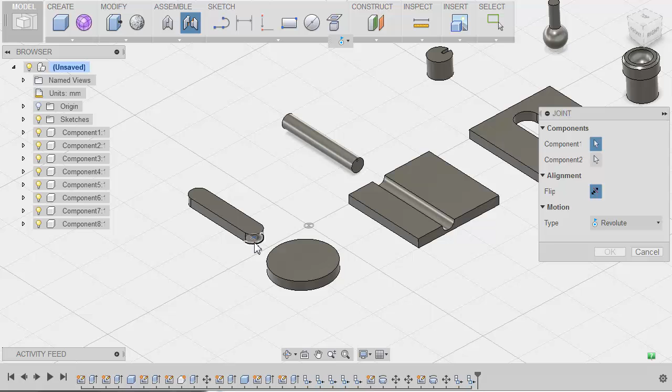We're going to start out by looking at the revolute joint. First, we'll select the point on the component we wish to move, and next we'll pick a point on the component we wish to remain still. A revolute joint allows the first component to revolve around a single axis. I'll choose OK to complete the command.

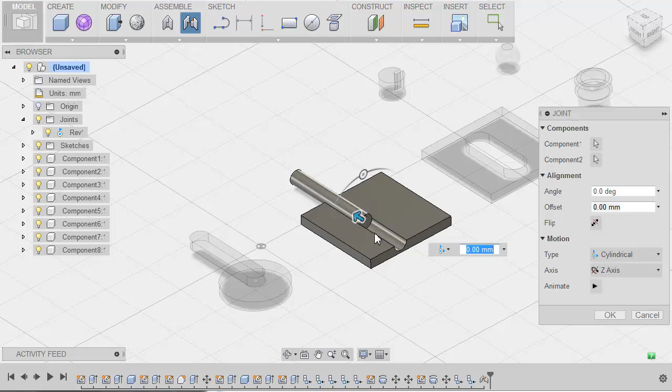Next up, let's take a look at a cylindrical joint. I'll right-click, choose Repeat Joint to run the joint command, and from the drop-down choose Cylindrical. We'll pick a point on the first item we wish to move, and a point on the second item, the one we wish to remain fixed. A cylindrical joint allows the first component to move and rotate along a single axis. I'll choose OK to complete this command.

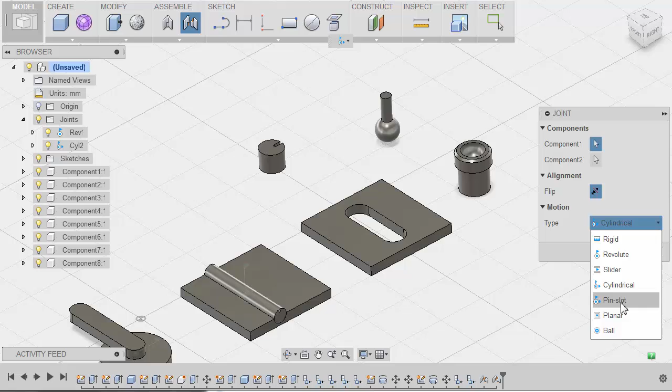Our next condition is pin slot. I'll right-click, choose Repeat Joint, and choose Pin Slot. Choose a point on my first component I wish to move, and choose a point on my second component. The pin slot joint allows the first component to rotate around its axis and move along a different axis. I'll choose OK to complete that command.

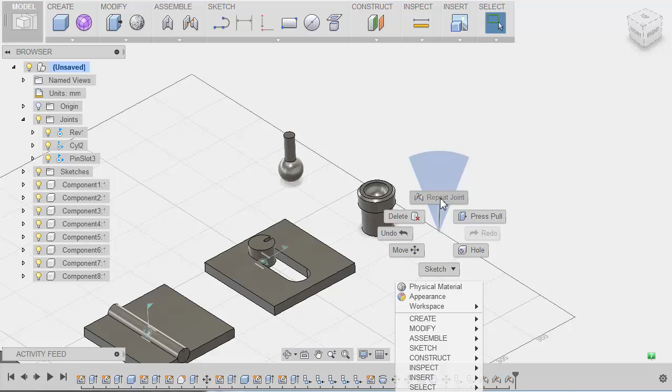Our final joint condition is the ball joint. I'll right-click, choose Repeat Joint. In the joint dialog, I'll pick Ball, and pick the point on the first component we wish to rotate around, and a point on the second component. You can see that the ball joint allows the component to rotate around 3 axes. I'll choose OK to complete this command.

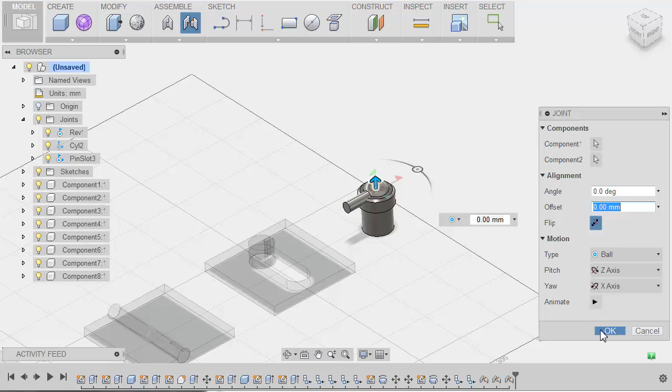Finally, I'll point out that all of these joints have been added to the browser in the Joints folder, and we can right-click and choose Edit Joint to edit these at any time. That concludes this video on Fusion 360's revolute, cylindrical, pin slot, and ball joints.